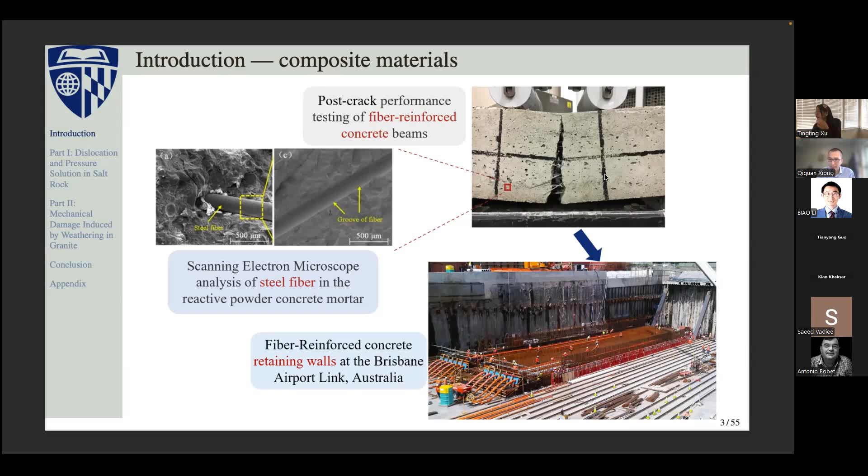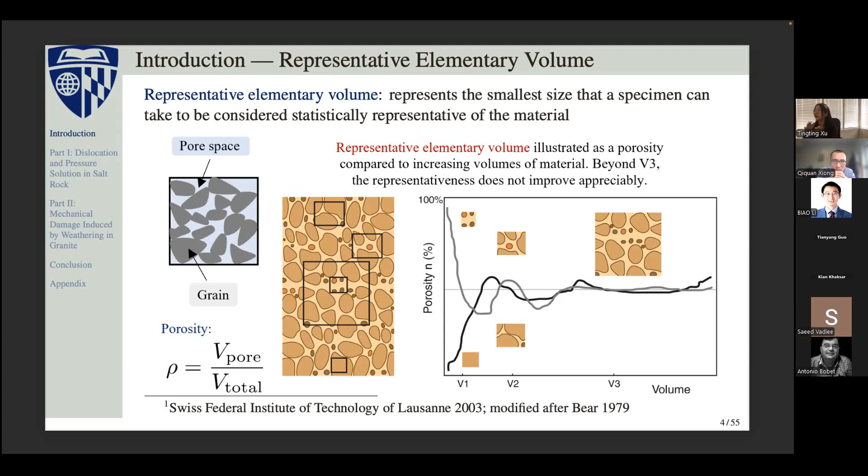Of course, with different properties that we want to consider, we get a different size of the representative elementary volume. Our study focuses on how to link the behavior of the microstructure to the behavior of the representative elementary volume. Here is a sketch of the scale separation of the three different scales we considered. From left to right, we have smaller and smaller scale. The left figure is a boundary value problem that we probably want to solve at a larger scale.

And the middle column of the figure is a REV, the representative elementary volume. And the right figure is a microstructure.

So in order to link the microstructure behavior to the REV behavior, we sometimes have two categories of models. The first is a phenomenological model, where we consider the internal variables as a scalar or a more complicated tensor, such as the porosity, the cracks, the mineral types, or the lattice orientation. And we use that to cast into our traditional elastic model, elastic damage model, elastic plastic model, or even the viscous model.

We use that phenomenological model to describe the response or behavior at the REV scale. On the other hand, we also have the so-called micromechanical model, where we consider the local behavior or local constitutive model, the relation between stress and strain at different locations, and then use a relation to link this local constitutive behavior to the REV constitutive behavior.

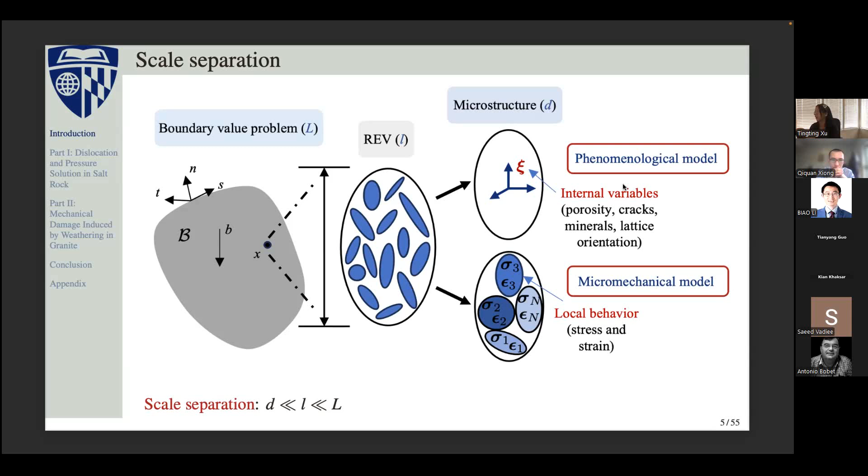So before going into the homogenization method, in this study, I want to introduce the full field homogenization method.

With the development of different numerical tools, if we want to solve the boundary value problem in solid mechanics or rock mechanics, we usually use a finite element solver. In order to get the response at each integration point in the finite element simulation, we can get it from different numerical tools, such as the finite element simulation itself, known as FE squared, or from the discrete element simulation, which is FEM and DEM coupling.

And sometimes we can also use the fast Fourier transform, so that is FE and FFT coupling. With these different numerical tools, we can get as many details of the microstructure as possible, and we can simulate and capture the behavior of the REV.

But on the other hand, you can imagine that with all these numerical tools, this is quite computationally expensive, so usually it will take a lot of time. Sometimes we can also use machine learning tools to train on all this simulation and bypass this time-consuming simulation. So that is the summary of the full field homogenization.

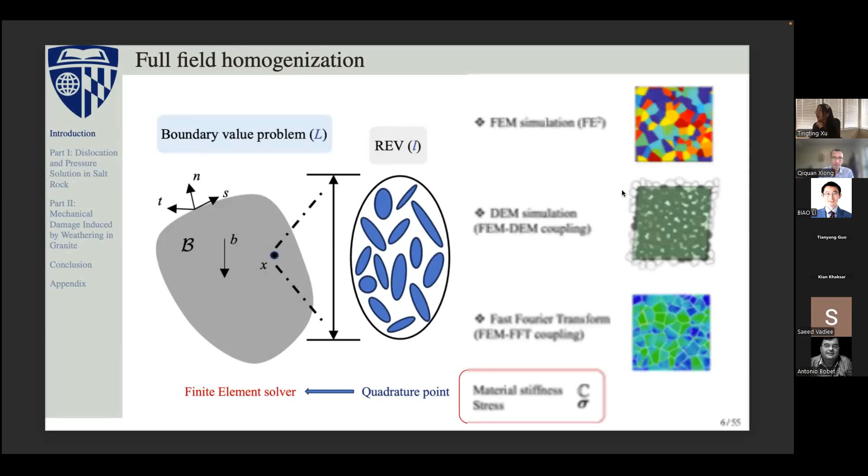The method we used in this study we call the mean field homogenization. Instead of using different numerical tools, which is time consuming, we consider the micro to macro transition as the integration of effective quantities. If you look at the equations here, the effective quantities of the whole REV can be considered as the volume integration of these quantities.

If we consider large strain or finite strain, we will have the kinematics and kinetics. We can take the deformation gradient as the volume average of the local deformation gradient, and also the PK stresses as the volume average of the local PK stresses. And if we consider small strain, we can of course take the strain and the Cauchy stresses.

With that understanding, we can pass the stiffness tensor and stresses into the integration point, into the REV behavior, and we use that behavior to do the finite element simulation.

This definitely couldn't capture as many details as I just introduced in the full field homogenization. But on the other hand, it's not as time consuming because it has an analytical solution. We can still capture some information of the microstructure and save some computational time. So that is the main focus in this study.

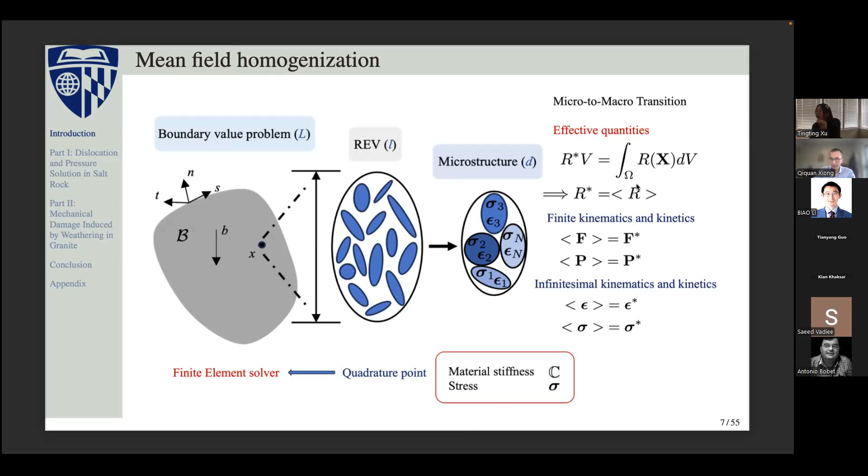I would take two different examples to explain this homogenization scheme. The first is a salt rock. Here is the motivation for why we want to investigate salt rock: it is quite an interesting material because it has high thermal conductivity, low permeability, and most importantly, it has a self-healing mechanism, making it a very good material for waste storage.

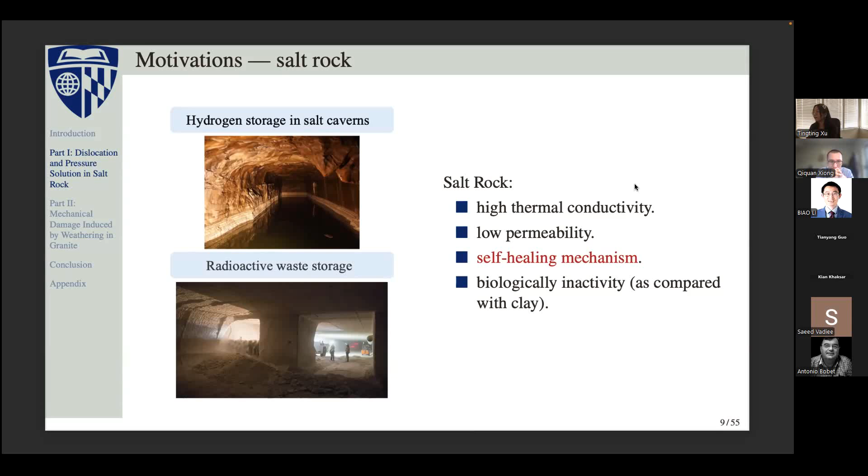Before we go into the actual model, we usually want to ask ourselves which deformation mechanisms we should focus on in our study. This really influences how we pick the representative elementary volume. In this study, we have two main deformation mechanisms to consider.

The first is dislocation creep, which is a time-dependent behavior that happens inside the crystal. The second is the so-called pressure solution.

Pressure solution is a chemical reaction. You can see, under the compression shown in the sketch at the bottom right, that there are two grains in contact with each other, and the solid will dissolve under this compression force. Then the ions will diffuse along this contact boundary, and in the third step, the ions will precipitate on the low stress or stress-free surface.

So those are the two deformation mechanisms that we really want to consider in this study, and all of these mechanisms are time dependent.

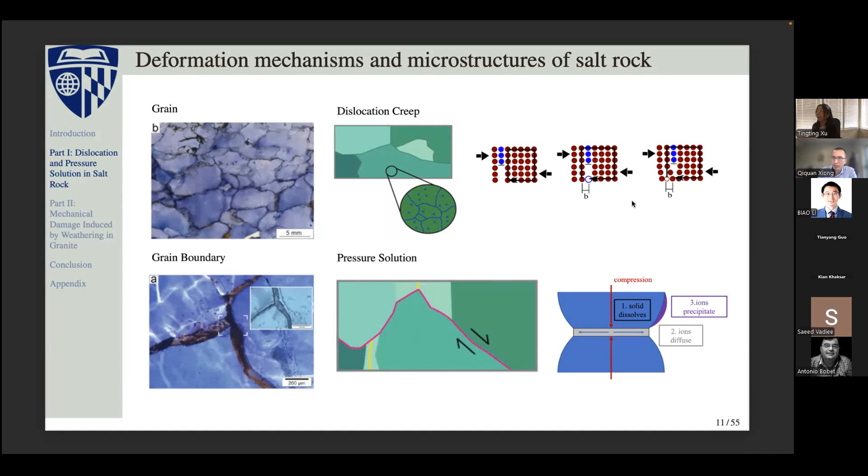With the understanding of these two deformation mechanisms, here is how we pick these microstructural representations. In this representative elementary volume, instead of just choosing the solid phase and the void phase, on top of the grain and the void, we also choose the grain boundary as the third phase. Here is a sketch of it, and we will have the mean field homogenization scheme.

There are two different conditions that we need to fulfill: the first is stress admissibility, and the second is strain compatibility. From these two equations, you can see how we link the microscopic or inclusion behavior to the REV behavior. These two quantities, the microscopic stress and the microscopic strain, are linked to the stress and strain in the REV.

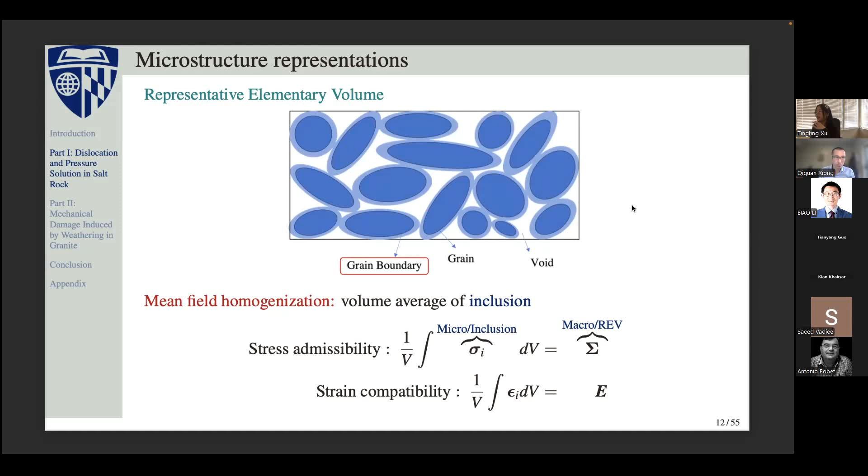With these two fundamental equations, we choose one of these homogenization methods, the so-called self-consistent method. This method is particularly designed for materials like halite, because it's a polycrystalline material with no dominated phase inside it. We consider each single crystal embedded in a so-called homogeneous equivalent medium, and we calculate the overall response by considering all the different crystals inside it.

If we look at the bottom equation, that is the fundamental equation in this mean field homogenization relation, telling us how to link the local behavior to the global behavior. On the left-hand side, we can see how epsilon, the strain in each inclusion, or the local strain, deviates from capital E naught, which is the average strain of this REV.

That deviation is linked by a linear relationship to the eigenstrain. The eigenstrain is defined as all types of inelastic strain in this inclusion. It can be considered as the plastic strain, viscous strain, or thermal misfit strain, all types of inelastic strain. In this linear relationship, we have a very important tensor called the Eshelby tensor, S, which is a fourth-order tensor providing a linear relationship between the deviation of the strain and the eigenstrain, or inelastic strain, inside the inclusion. That is the fundamental equation.

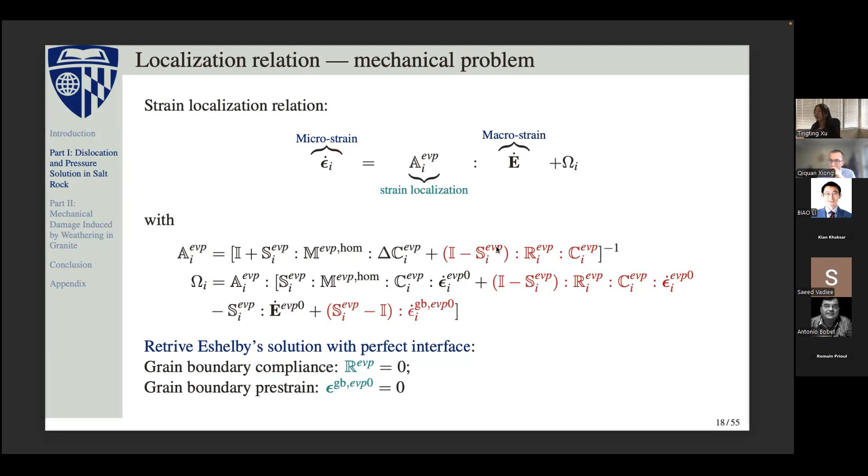So this is a linear relation, and with this simulation we also provide a linear relation for the diffusion problem. In addition to the mechanical problem, we have a very similar phenomenon, at least from the formulation, really similar to the mechanical problem. We have a linear relation that bridges the micro concentration gradient, and from the bottom equations you can see how it bridges the microflux to the macroflux.

So with all these equations, right now we have a local behavior, and we have the linkage between the local behavior and the global behavior. We can simulate it at a laboratory scale.

Here is a recall of the sketch of this REV. We have this void inclusion, and we have also the crystal inclusion with the interface embedded in the homogeneous equivalent medium. The simulation condition or boundary condition for the simulation case is an oedometric test, meaning we have lateral constraints and we apply the vertical stress. We keep this stress constant, so it can give us a viscous behavior of the material.

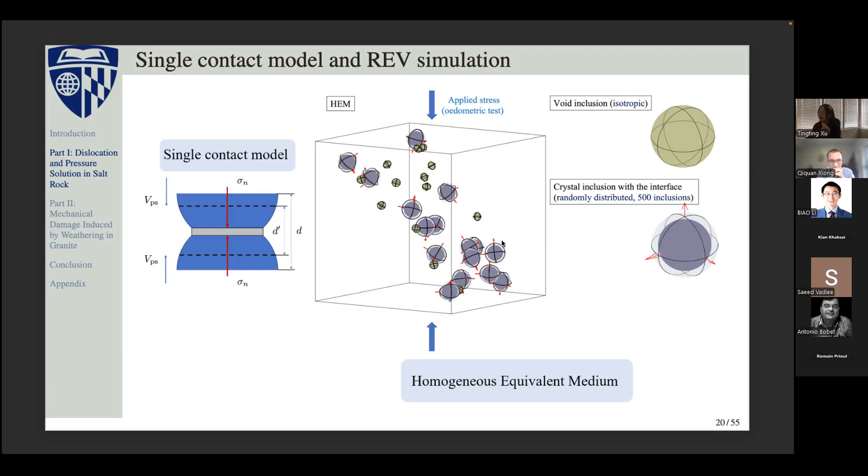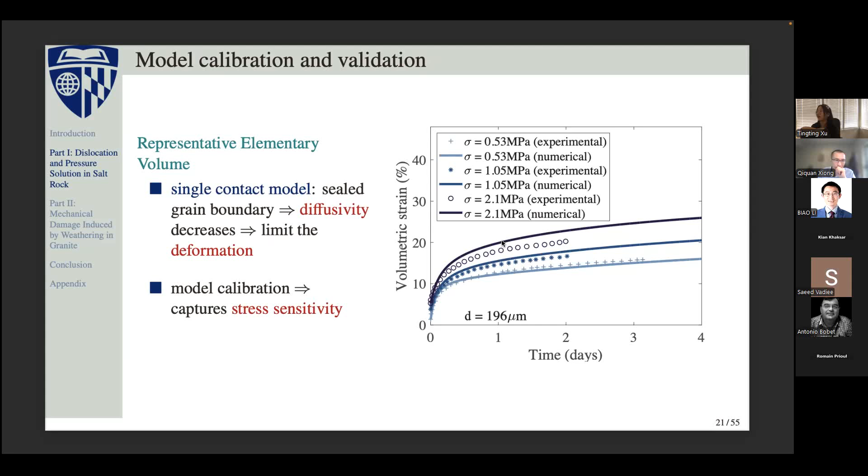The first thing is that we compare these results with, or validate these results with, some experimental data. You can see in the right figure a comparison between experimental data and the numerical results. Our model can actually capture this stress sensitivity, and with higher stress we get higher volumetric strain. It can also capture the influence of different grain sizes of this salt rock, which can be found in the paper in detail.

With the understanding of the macroscopic or REV behavior in the lab, we want to focus on the microscopic perspective. First, we present here the microscopic effective stress evolution. You can see that from left to right, as time evolves, this effective stress decreases — its magnitude shrinks a little bit.

Here are two explanations for that. The first is healing on the void: because the volume fraction of solid increases, the micro effective stress will decrease. The second explanation is that we also have healing on the interface, which causes the grain boundary solid-to-solid contact to increase. Therefore, we get effective stress decreasing.

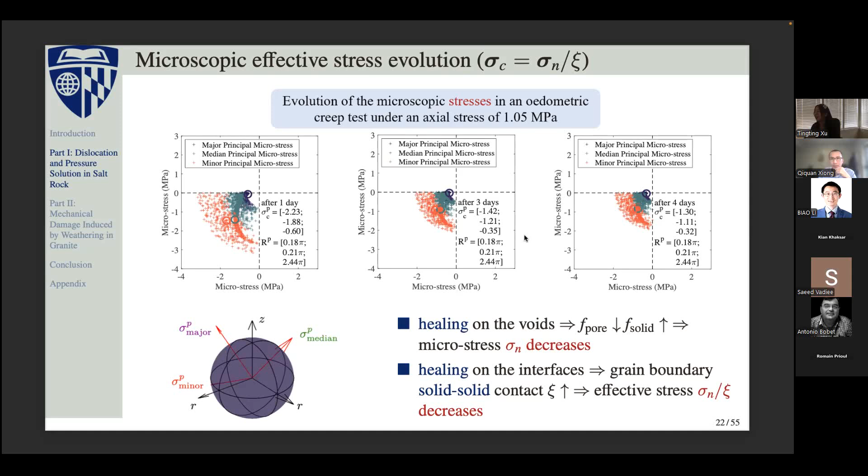So the local stress, or effective stress, will control the behavior of the local inclusion and will therefore influence the global behavior. That is the first observation from the microscopic perspective.

The second observation is not the mechanical response, but the diffusion response. As I said, because the solid-to-solid contact increases, you can imagine that on the grain boundary, diffusivity will decrease as time evolves. From left to right, you can see the magnitude of the micro diffusivity on each contact decreases. We see that the solid-to-solid contact increases on the grain boundary, which is actually the limiting factor for the pressure solution mechanism. This contact healing will prevent the pressure solution from continuing to happen.

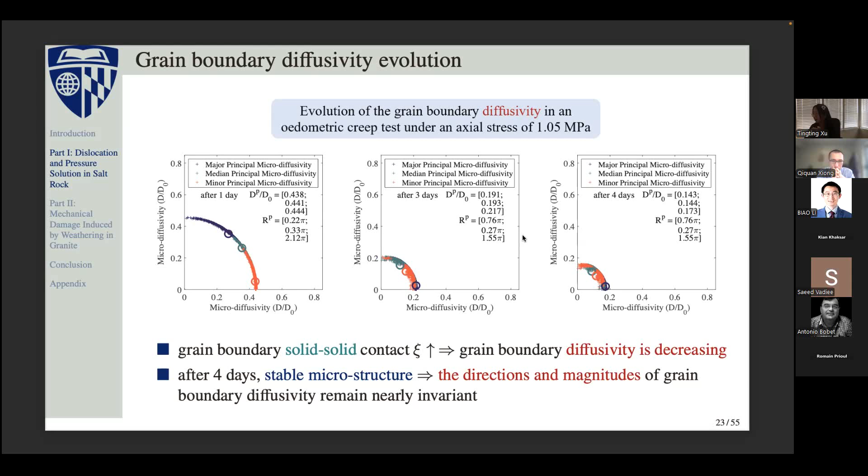So that is some observations from the laboratory and also some explanations from the microscopic scale. To summarize this study, we consider two different deformation mechanisms explicitly, and based on the understanding of these two different time-dependent mechanisms, we select different phases in our REV scale. You can see that we choose the grain boundary, the grain, and the void.

With our understanding of the local behavior, and the linkage between the local behavior and global behavior, we can get quite good agreement with experimental data. We can also explain why we get such experimental data from the microscopic perspective. So this is the first material.

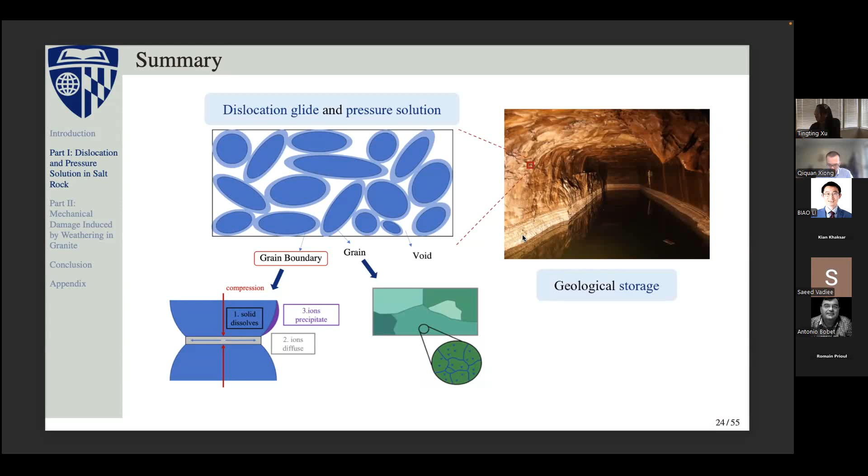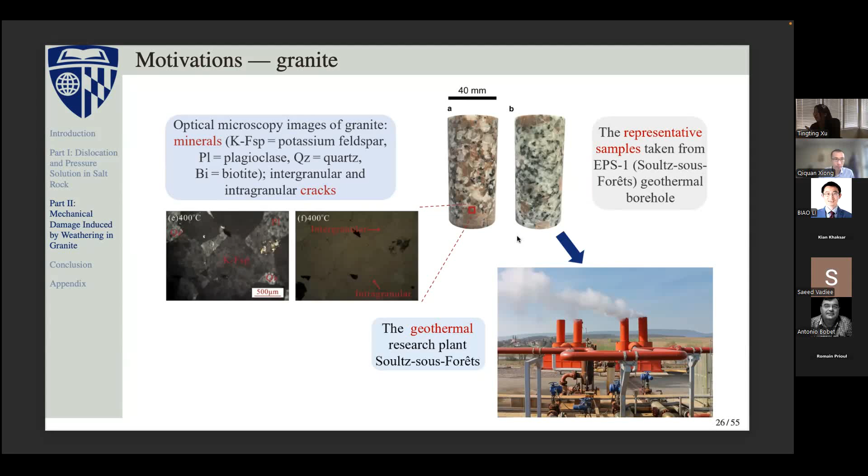The second example is granite, which is quite common in rock mechanics. Here is the motivation for this study. We have different scales of this granite, and from the micro image we can see different minerals, and possibly intergranular and intragranular cracks. All these different types of minerals and cracks will influence the response of the representative samples that we test in the lab, which will also influence the performance of the geothermal structure built upon this granite. So this is the different scale separation.

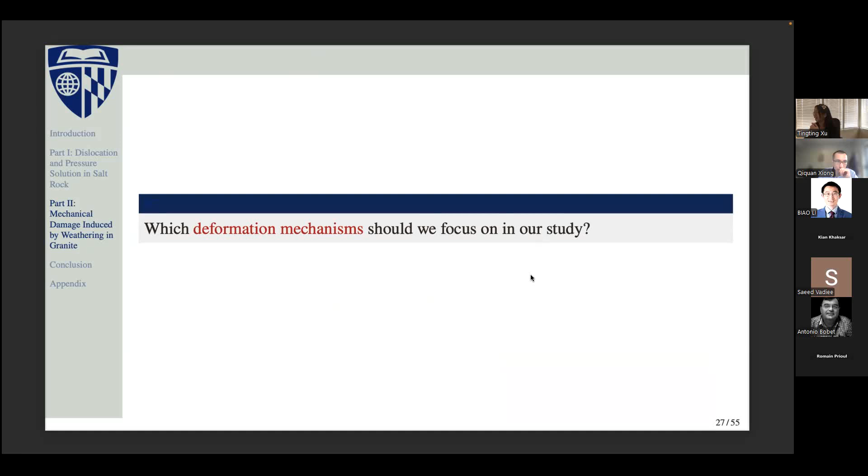We again ask the question: what phenomenon do we really want to simulate in this study? It's quite different from other studies on granite, because we want to consider the weathering effect. Here we only consider one mineral weathering, called biotite. Under weathering, the biotite transforms into other minerals and the volume of the biotite expands. You can imagine that because of this expansion, there is some misfit strain.

That misfit strain is also the eigenstrain we just explained, which is one type of inelastic strain. This misfit strain can possibly cause microfracture or microcrack propagation. So there are two different mechanisms we want to consider: the biotite expansion because of weathering, and microcrack propagation because of weathering.

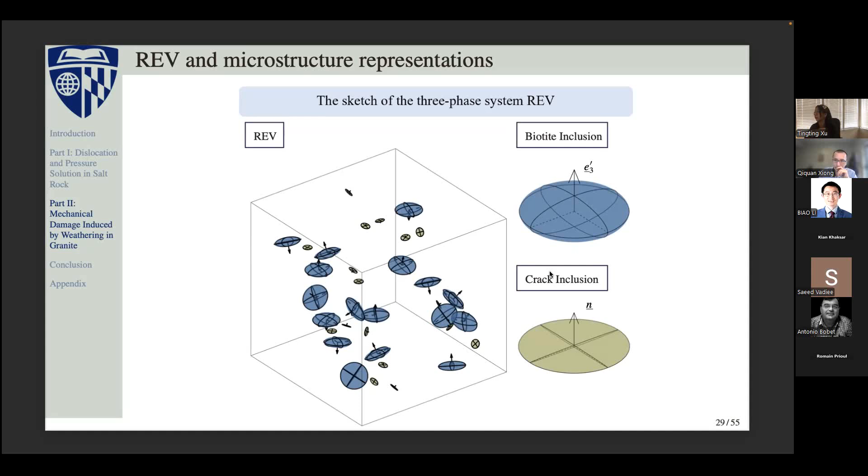With the understanding of these two deformation mechanisms, we construct this representative elementary volume, and consider two different types of inclusions. The first is the biotite inclusion, and the second is the crack inclusion. The biotite inclusion simulates the biotite expansion under weathering, and the crack inclusion simulates the microcrack propagation in this study.

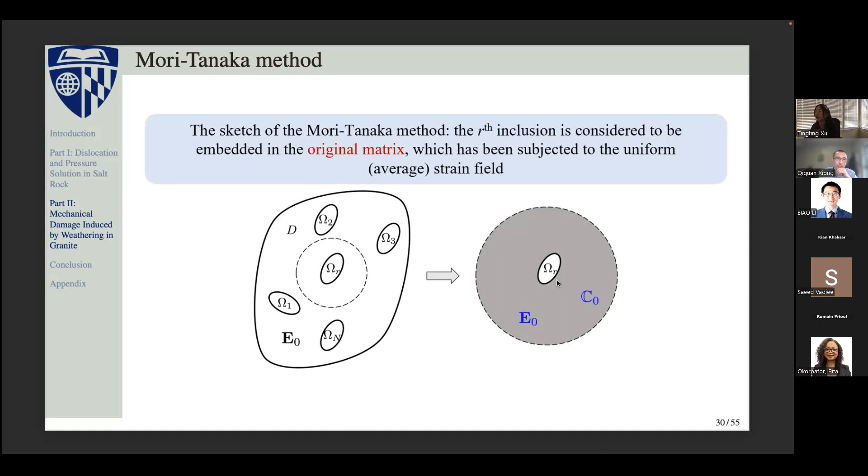Here we use a slightly different method from what I mentioned before, which is a self-consistent method for polycrystal material. In this study we actually focus on the biotite, meaning we have a dominant mineral we want to focus on, and we consider all other minerals as a matrix. So the biotite and the crack are embedded in this matrix, which means the Mori-Tanaka method is more suitable for this study. But the fundamental equations are similar; just the exact detailed formulation for the Mori-Tanaka method and self-consistent method are slightly different, and the solving algorithm is slightly different.

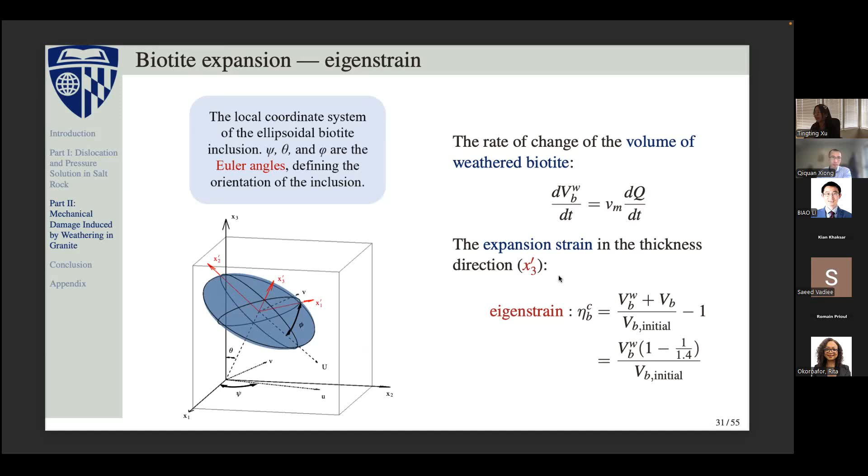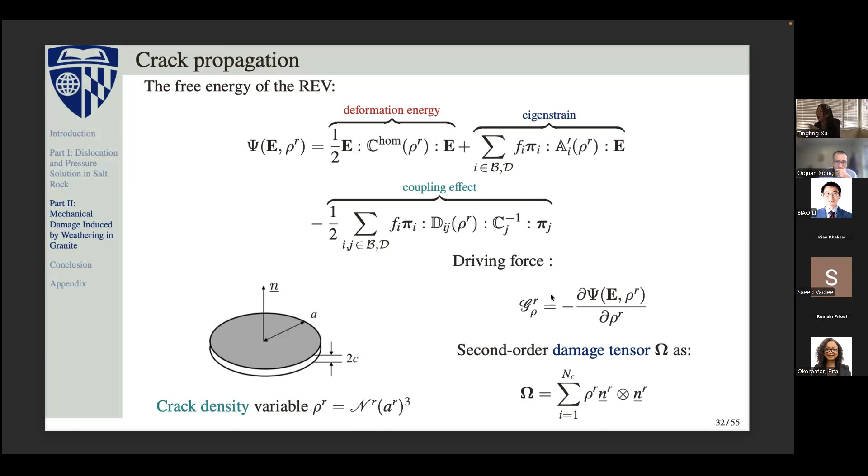With this free energy formulation, we can easily get the driving force for microcrack propagation by taking the derivative with respect to the crack density. We can also define a second order damage tensor as a directional summation of these crack density variables, which is an overall tensor characterizing the internal variables.

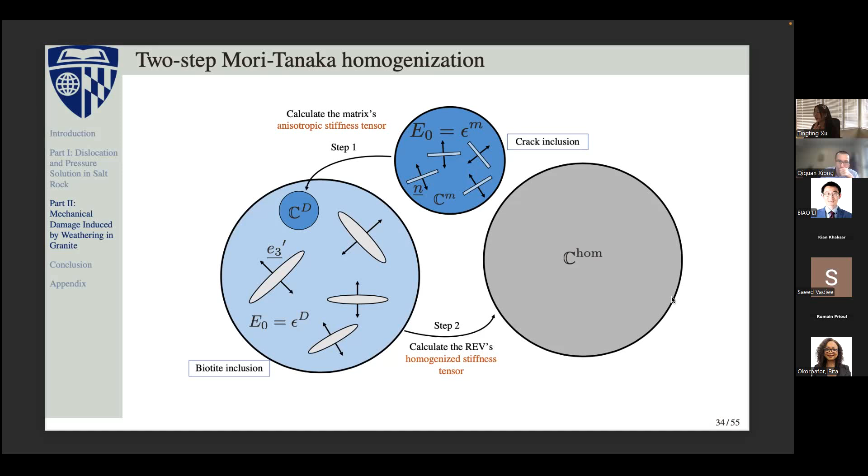So in order to avoid mistakes in the stiffness tensor, we have this two-step homogenization scheme. The first step is that we calculate the crack inside this undamaged matrix, and we calculate the anisotropic stiffness tensor for this damaged matrix. The second step is that we calculate the biotites embedded in this damaged matrix. We get the finalized homogenized stiffness tensor, which is the C homogenized here, and that is also the value that enters into the free energy of the REV that I just mentioned.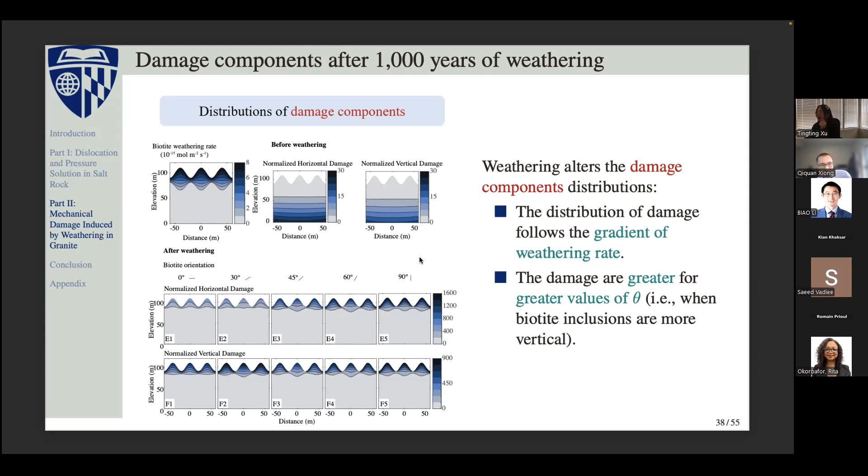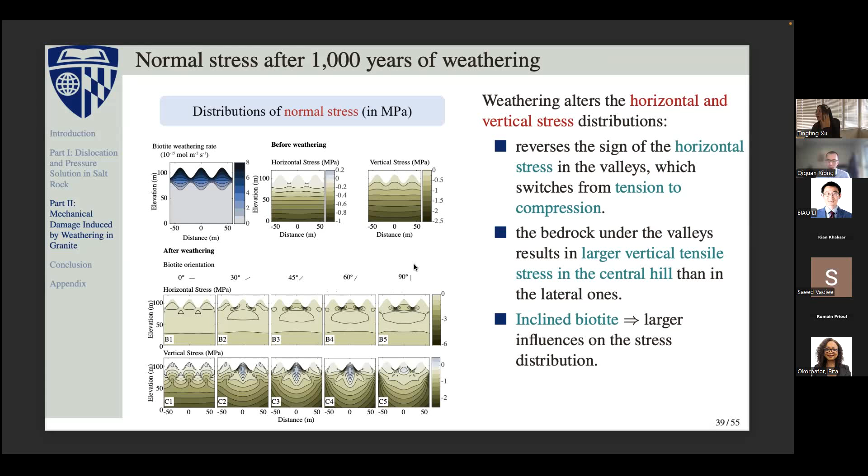With different biotite orientations, we get different patterns of the horizontal stress and vertical stress. With the inclined biotite, we get more alterations in terms of the stress distributions. So that's all of the above simulations, which are simulations where we apply or predefine the weathering pattern.

The second simulation case I want to simulate considers not only micro crack propagation, but also large fracture propagation, and how this fracture propagation couples with the weathering front propagation.

Here we also use Abaqus to simulate, using a user-defined material for the bulk element, which is the granite element, and a user-defined element to simulate the cohesive zone element.

On top of that, we also consider the information exchange between the bulk element and the cohesive zone element. First, we consider that the microcracks and weathering in the bulk element of this granite will degrade the strength of the cohesive behavior in the neighboring cohesive element.

And the cohesive element, once the fracture propagates, can actually initiate the weathering. So we have this information exchange between two different types of elements, which helps us predict the feedback effects between weathering and fracture propagation, and also helps simulate how the weathering front moves.

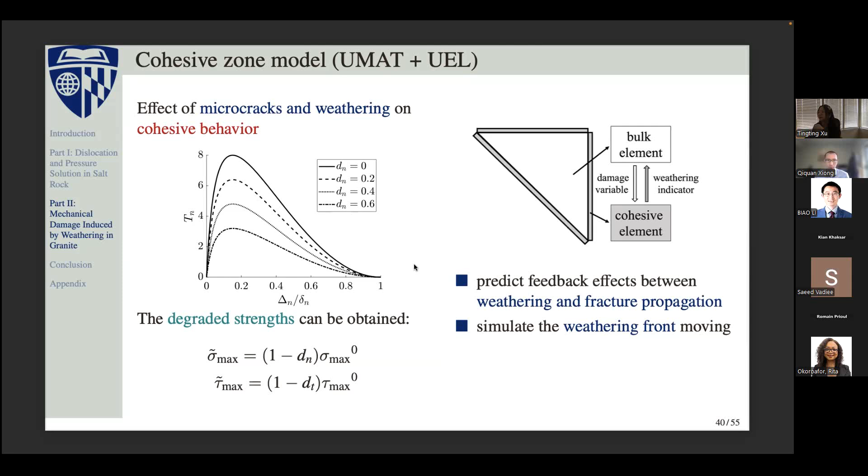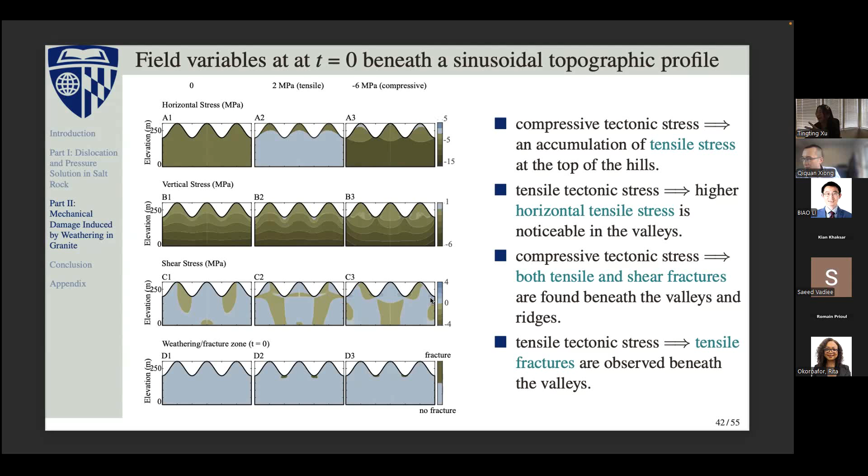For compressive tectonic stress, the weathering regions tend to spread laterally beneath both the valleys and ridges. In contrast, for tensile tectonic stress, the weathering front advances deeper under the valleys. These observations are consistent with field observations for different tectonic stresses.

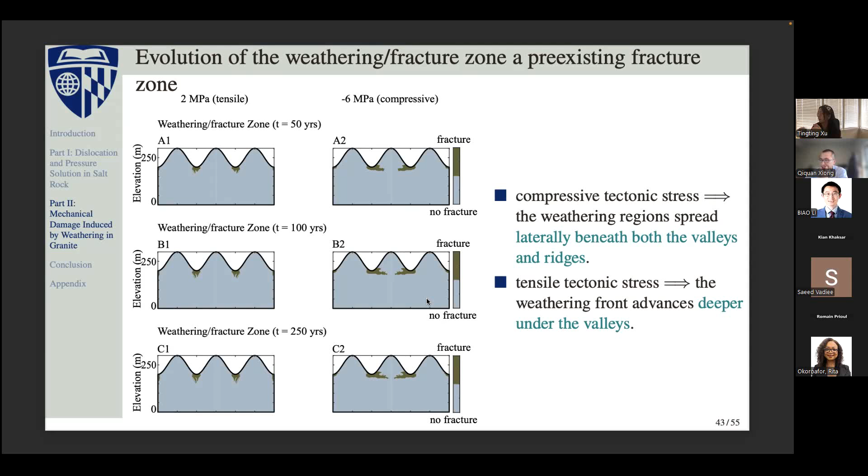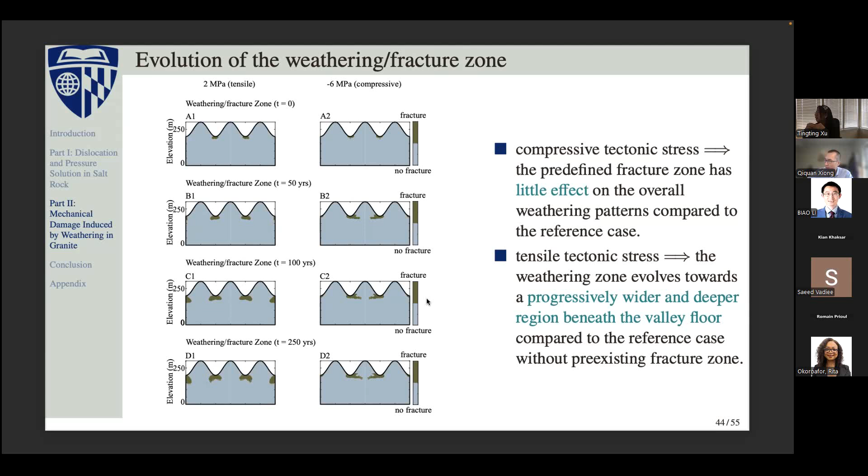So all these observations are qualitatively consistent with field observations under different tectonic stress conditions. If I try to summarize this study, it's quite different from part one, because part one only focused on the complicated behavior at the REV scale, providing material point simulation at that scale.

In this study, we actually do three different scales. At the microstructure scale, we consider biotite expansion and microcrack propagation. At the REV scale, we use a UMAT to implement it into the finite element solver to solve the boundary value problem, or the large scale problem.

And we also combine the bulk element and the cohesive zone element to simulate the fracture propagation. We consider these feedback mechanisms by considering the information exchange between the bulk element, the solid element, and also the cohesive zone element.

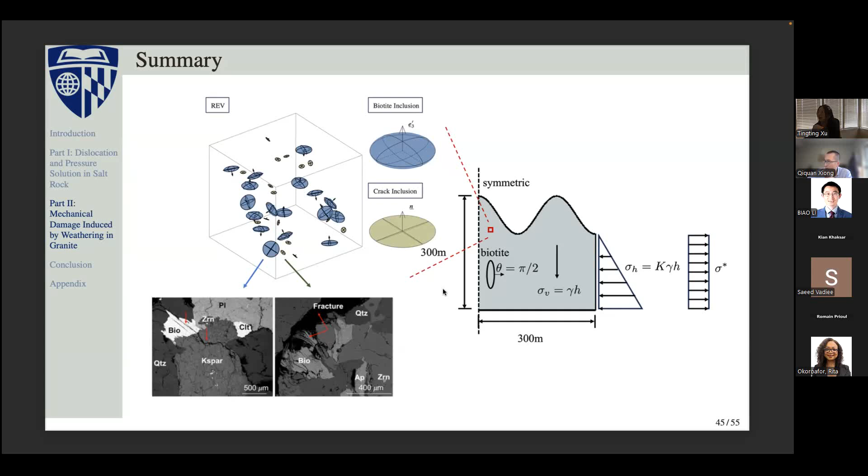So that is the graphic summary of phase two, part two. And I have a little bit of a summary of the contributions of the highlight model.

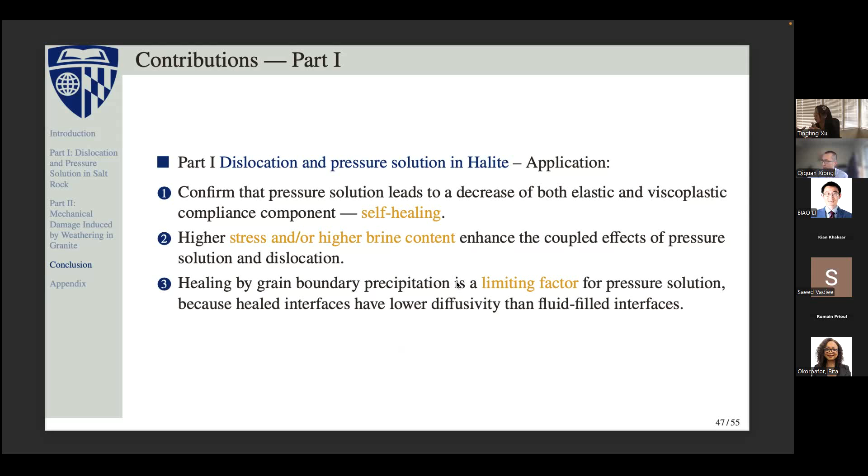In terms of the application, we see that the model is able to capture the self-healing mechanism, and it can also give us an explanation for why the grain-to-grain contact healing is a limiting factor of the pressure solution mechanisms, and how all these limiting factors influence the overall response observed in the laboratory.

And in terms of the theoretical part, it's actually not limited to the application to the halite model, but it provides a pretty general homogenization framework for this kind of nonlinear and time-dependent problem. It can also consider the jumps of the displacement and the flux inside this problem.

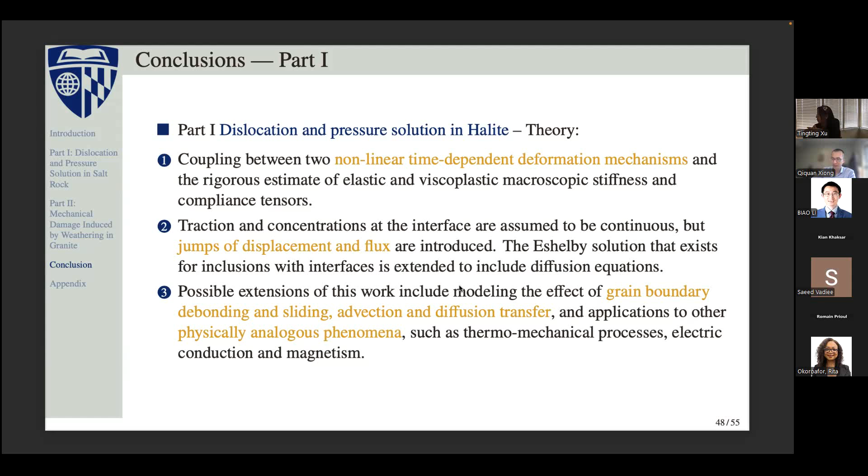That is pretty innovative, and with that, this model framework is expected to simulate other similar phenomena, such as grain boundary debonding, sliding, advection, and diffusion transfer. So we can expand this model to consider other problems.

For this second part on granite, as I just said, we are not limited to studying at the material point integration point scale. We actually implemented it to consider a large scale problem.

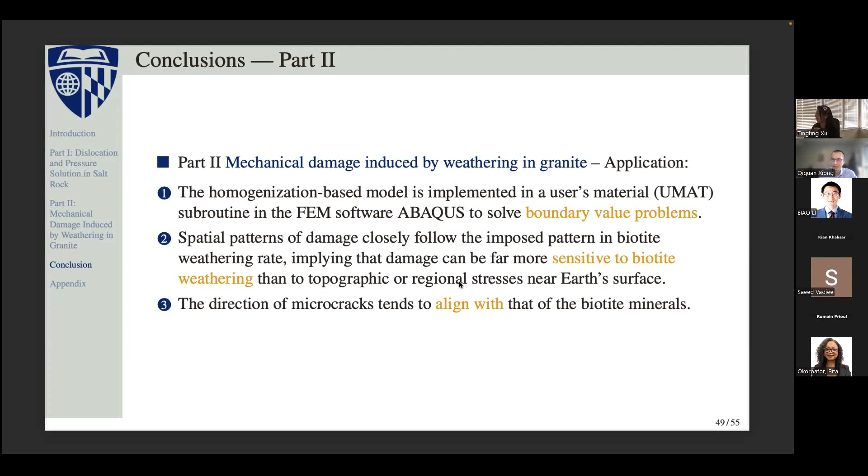And we also investigate how sensitive this microcrack propagation is to the weathering process. So all these observations are pretty consistent with field observations, which is quite exciting.

In terms of the theoretical part, first of all, at the material point scale, we use the two-step Mori-Tanaka method to consider both the microcrack propagation and also the biotite expansion. On top of that, we're using a thermodynamic-based model to consider how the microcrack propagates based on this driving force.

And by combining this bulk element and also the cohesive zone element, we can actually simulate the feedback mechanisms between the weathering front advancing and also the damage propagation.

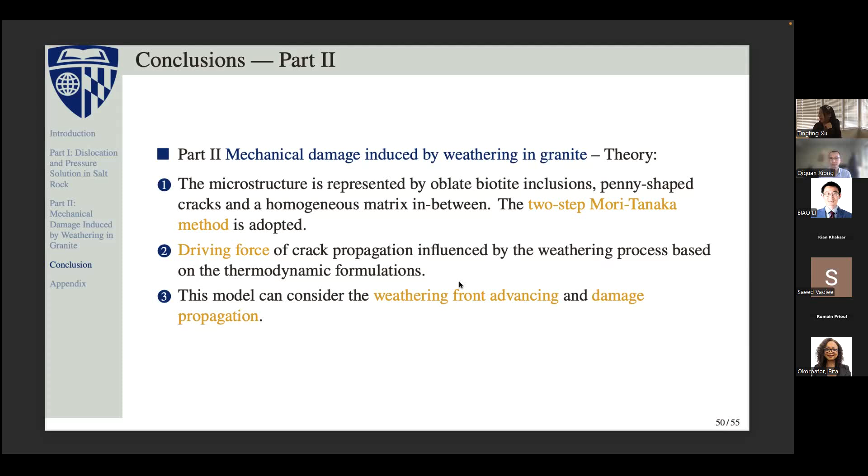So that will conclude the talk today.

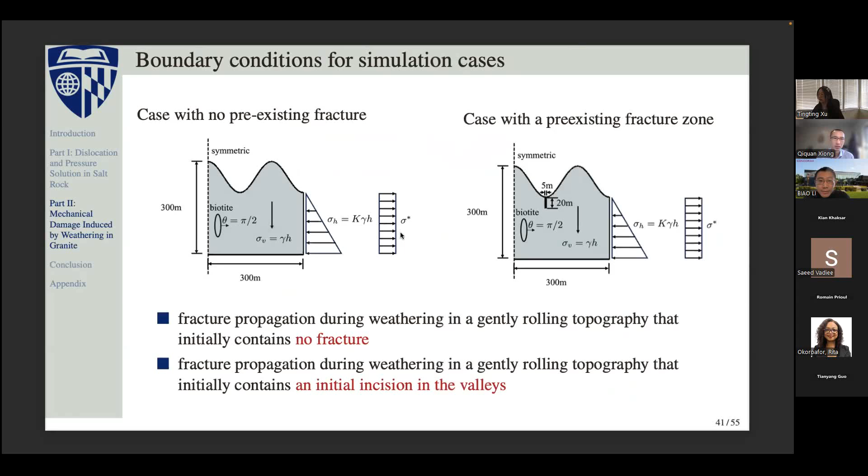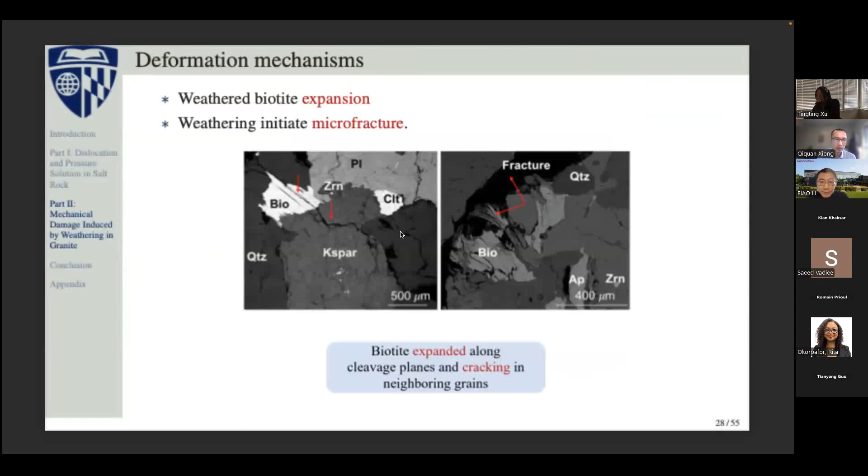Thank you very much, a very nice presentation, Tingting, and it's a very wonderful work. I have one question related to the Eshelby tensor stuff, because in your conclusion you mentioned about the homogenization considering the viscoplastic, but in the tensor stuff I didn't capture where the viscoplastic can be quantified.

You mean in the basic equation that I showed before? Yeah, because I see that only elastic linear relation. Oh yeah, this one is actually - yeah, you mean this one?

This one is actually the traditional one of the linear elastic. But in my formulation, I actually have two terms, for both the elastic and the viscoplastic part. So okay, so viscoplastic is added in your formulation.

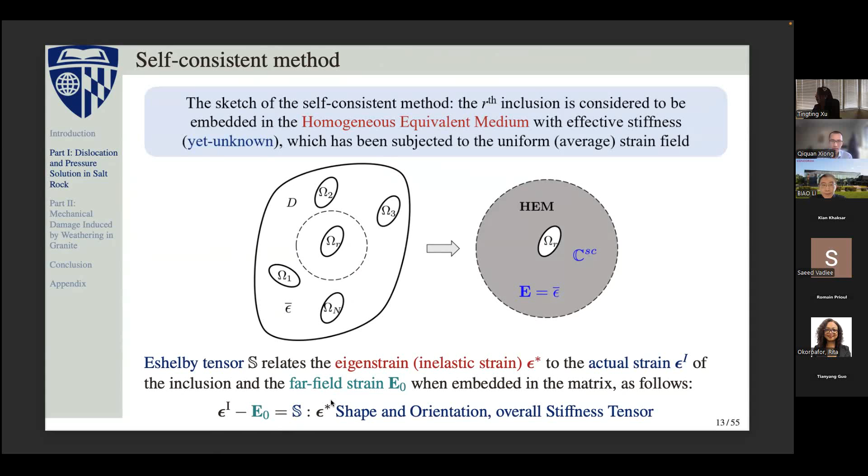I see, yes, that's true. So we have two different types of the Eshelby's tensor. Okay, another point is the pressure solution stuff is time dependent, right?

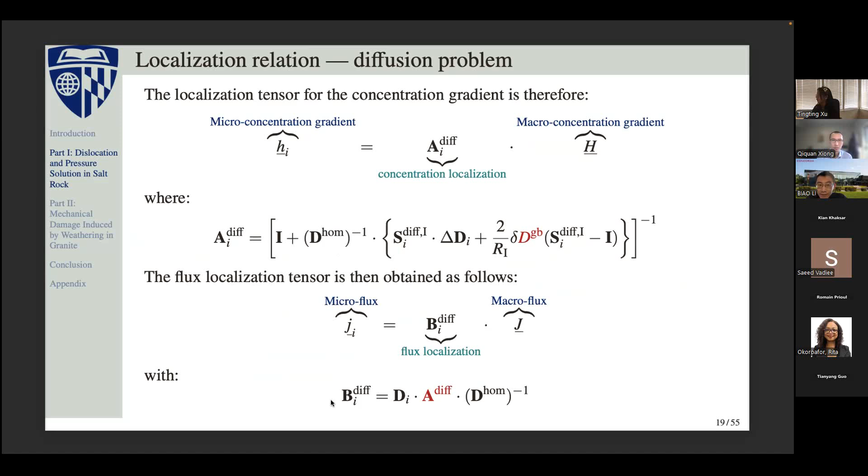The process, yeah. So which part is considering the time, the time dependent stuff, the process? So if you look at this, yeah, I didn't show in the slides, I think.

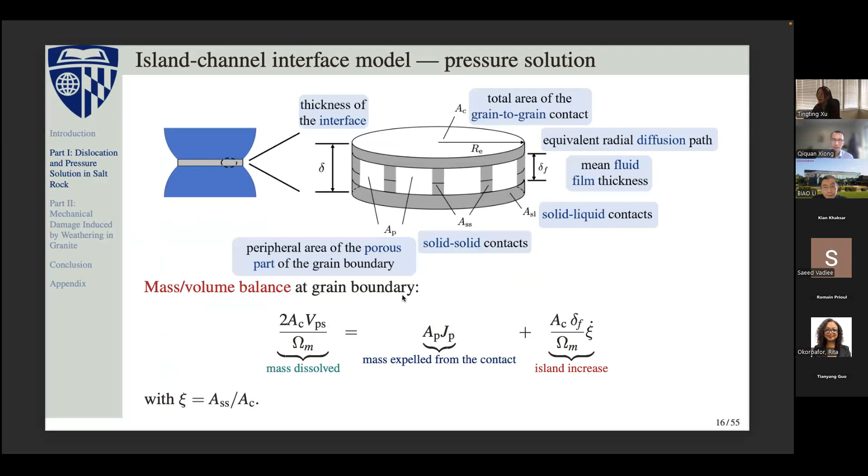But you can see that it's very similar to this dislocation. So for dislocation, we have the viscoplastic strain rate that - oh yes, here, yeah. So in the pressure solution part, at the end of all this simulation, all these balance equations, I also have the viscous strain rate that's related to stress. So they share a very similar formulation.

So that's why we can cascade into the viscoplastic Eshelby formulation. So that means with the constant stress applied, I can also have the pressure solution happen. So that's how we explain this is a time-dependent behavior.

Okay, great. Is it coupled with the pore pressure so far in your simulation? Not yet, it's very tricky to include. Yeah, that's going to be very tricky.

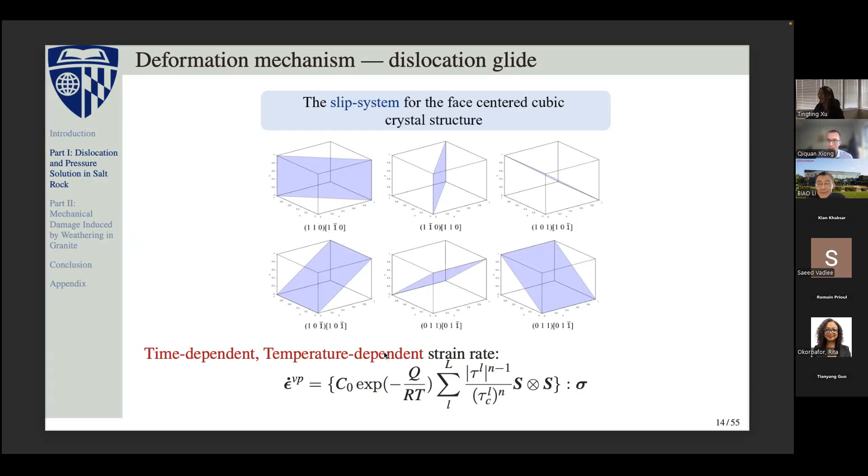Yeah, you didn't consider the pressure inside the void. That's a little bit complicated. But the pore pressure has a term in the formulation, if you go to the detailed formulation in my paper. Okay, but it's not completely considered in this problem - I didn't consider the pore pressure change, or the eigenstrain change inside the void inclusion.

Okay, wonderful, thank you so much. Thank you.